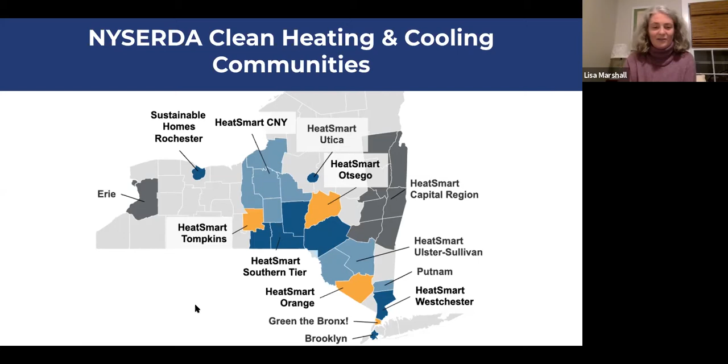So why do we need such a thing as a clean heating and cooling program, or a HeatSmart program? Well, the reason is because you might have heard about the climate crisis, or some are calling it the climate emergency. And the reason we are having a problem with our climate is because of all the greenhouse gas emissions from burning fossil fuels, mostly, that are going up and up each year. I'm 52. They've been going up every year of my life without any pause. And in order to maintain a livable climate for us and our children, and all of the wonderful diverse species on the planet, we're going to need to do something about this pretty quickly.

And so when we look at where those greenhouse gas emissions come from here in New York State, they come from basically three main sectors, which are transportation, on-site combustion, and electricity generation. And this on-site combustion piece of the pie, which is 38% here, is a little bit of a fudged number. It's actually a bigger number total than transportation if you calculate it a slightly more honest way.

So a lot of that on-site combustion is home heating. And that's because 90% of our households in New York use fossil fuels to heat our homes. So 90% of us have a furnace or a boiler churning away, eating up fossil fuels to produce heat. And that is why HeatSmart exists, to help educate people and make it easier for people to adopt alternatives to that current scenario.

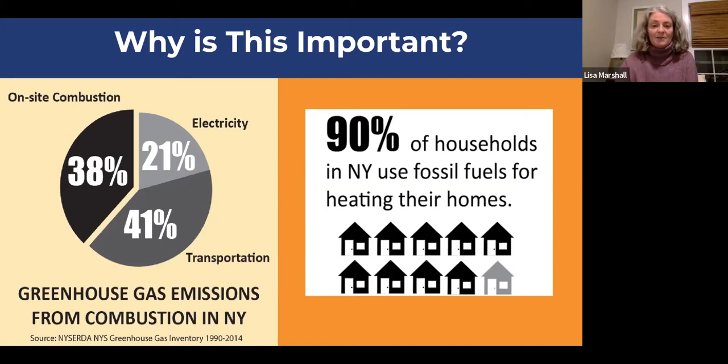So how do we do that? Well, that's a pretty daunting question. And the main way we are going to reduce our greenhouse gas emissions in these sectors, transportation and home and on-site combustion, is something that has been termed beneficial electrification. So if we electrify our cars and if we electrify our heating,

we can immediately have more efficient heating and transportation in our homes and for our cars with the current way that we generate electricity. And then as we add more and more renewables to the electricity grid, those methods of transportation and heating become even more efficient.

So this is a great graph from the Acadia Center that just shows, this top is what most of us have now, a fossil fuel car and a fossil fuel burning heating system in our house. And this is how many million metric tons of CO2 are produced by that. And down below, you can see that drops down significantly if you switch that to electricity. And this says current RPS, that's with the way we produce our electricity now.

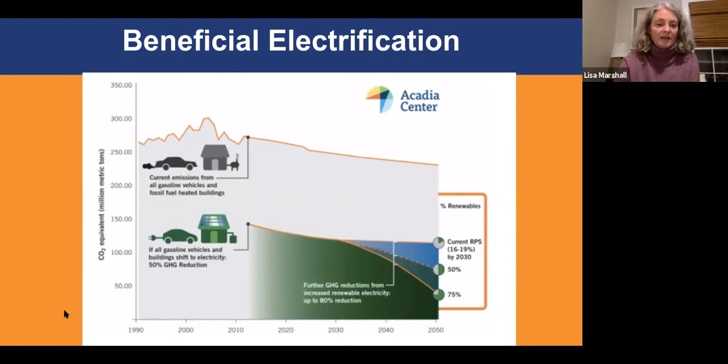So more specifically, because this webinar is steps to a fossil-free home, how are we using energy in our homes? This is not for New York. The next slide will show you New York more specifically, but I liked this slide because of the cute little house. And this is sort of an average house in the US, how they use energy.

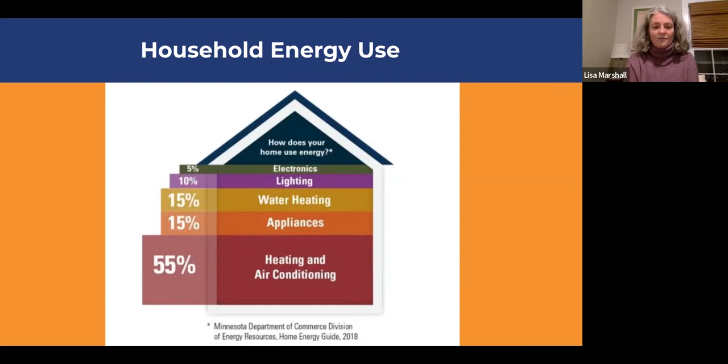55% of our energy use in our homes is heating and air conditioning, and most of that is heating. Only a very small sliver is air conditioning. 15% is running our appliances, 15% is hot water heating, 10% is lighting, and 5% is electronics. So the cell phone, the computer, the TV, etc. And that is sort of an average breakdown. Of course, your mileage may vary.

This next slide shows you a little bit more closely how we're using energy in our homes here in New York. So on the right-hand side, it's showing New York compared to the average mid-Atlantic states region and the whole US. And as you can see, space heating, this pink part, is 56% of how we're using energy in our homes. It's just huge because we live in this cold climate, and only 1% in New York is air conditioning.

Although this is a little bit of an older graph, I think it's from 2012. So that may have shifted somewhat in the intervening years, but generally speaking, it's about right. And then I want you to notice this 17%, this orange pie piece for water heating, because we're going to talk about that as one of the steps to a fossil-free home. And then 26% appliances, electronics, and lighting.

And I'm not really going to talk about lighting, but I'll do a shout out right now. If you haven't ever worked with the energy navigators to have a look at your own house, they are a great group. They're volunteers who are trained as energy navigators, and they will come to your house and help you look at things very specifically, like your lighting.

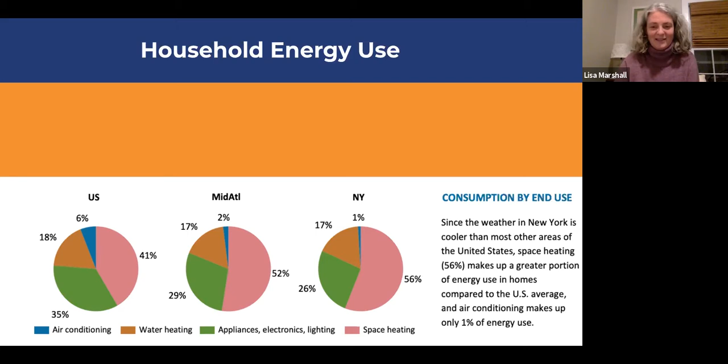And basically, if you're not using LED light bulbs yet, then get on it, because they're by far the longest lasting and most efficient light bulbs. And that's all I'm going to say about light bulbs. Okay. So 56% of the energy in New York households is for space heating, and 17% for hot water.

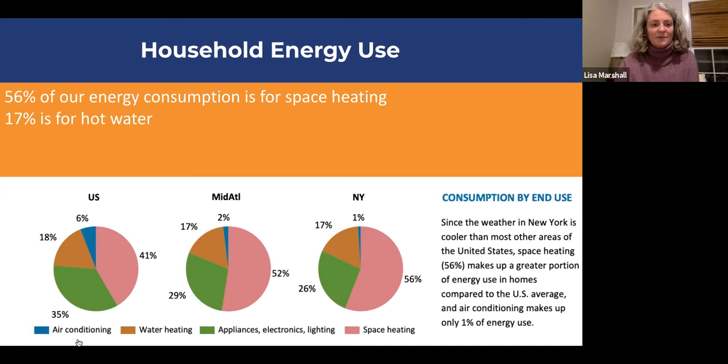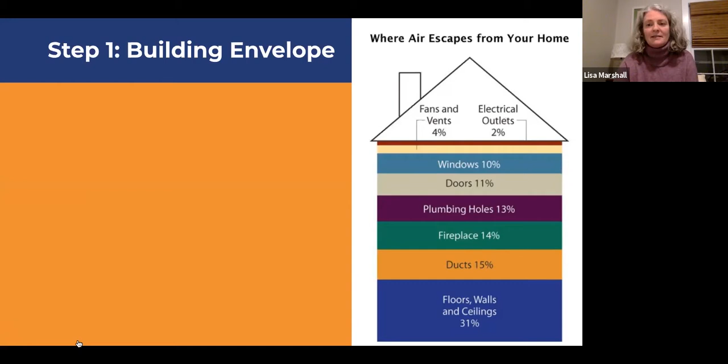So what are these steps that we're talking about? Step one is the building envelope. So that is how well insulated and sealed is your house. And as you can see on the right here, this is how heat energy escapes from your house. All these different places, and the most is the floors, walls, and ceilings, but also the ducts, the fireplace, the plumbing, doors, windows, fans, vents, and electrical outlets.

I just want to point out that windows are 10% on average in this graphic. And so a lot of people will say, well, the first thing you should do is replace your windows. And I don't think that's the first thing you should do. I personally preserve the beautiful antique wood windows in my house and try to seal up other things first.

Windows are a big piece, but they aren't as big as most people think. In the average home, air leakage is squandering 15 to 25% of the heat you're producing. So the first step to a fossil-free home is to make sure you're not literally throwing that heat out the window, so you're burning less fossil fuels to heat your house. And the same amount of unwanted heat is coming into our houses in the summer equivalently.

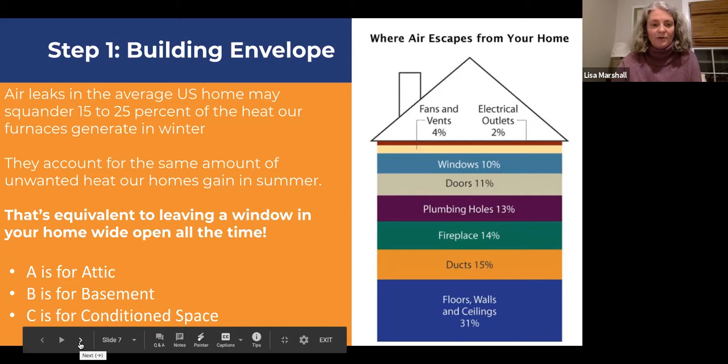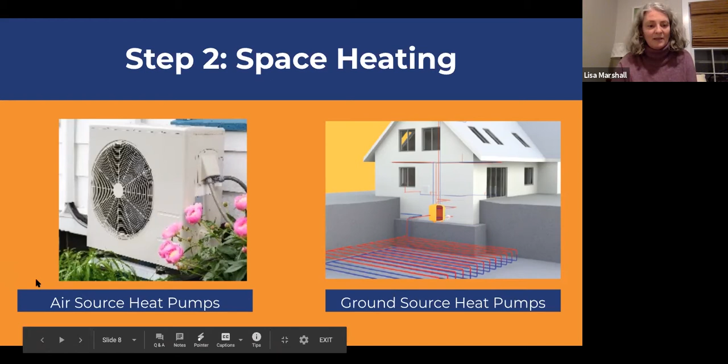So what is a heat pump? If you're not familiar with heat pumps at all, you might be confused about them. Actually, all of you have a heat pump in your home - that's what runs your refrigerator. You might have noticed there's a refrigeration loop on the back of your refrigerator that keeps the inside cool, and you might have put your hand behind a refrigerator and felt that it was very warm out there. That's because of the way the refrigeration loop works. Inside that loop is a chemical called a refrigerant, and the loop works on the principles of physics.

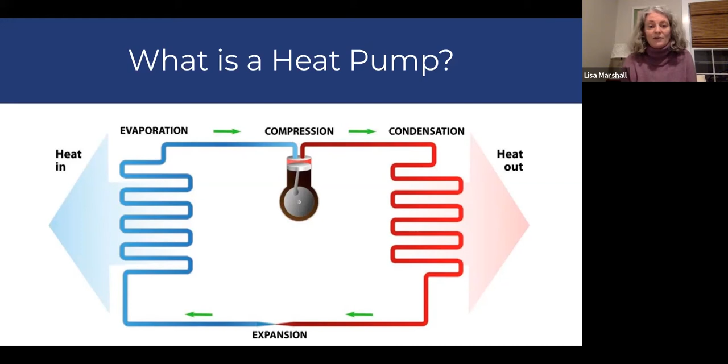So when you condense the refrigerant, you get heat out because there's a phase change in the refrigerant. And when you expand it, you get heat in when you evaporate that refrigerant. It's sort of a genius thing, because it's just this incredibly efficient way to take heat out of the air or out of the ground and put it through this refrigeration cycle that allows you to use that heat to air condition or heat your house.

So ground source heat pumps basically have three main components. There's the loop field, shown here on the right - that's a horizontal loop field. There can also be a vertical loop field where you dig vertical boreholes and put the loops down in those, or you can put heat exchange loops in a body of water sometimes. Those collect the heat from the ground and bring it into your house, and then it goes into the heat pump itself, which is this little guy on the left. It looks kind of big in that picture, but it's really about the size of a refrigerator, maybe a little bit bigger than your existing furnace or boiler, but it's not enormous.

That's where the refrigerant loop takes that heat from the ground and puts it through the condensation process, and puts the heat out into your house through your distribution system, which is the third part. In this one, we're seeing a forced air distribution system, which is these ducts that take the hot air and distribute it throughout the house.

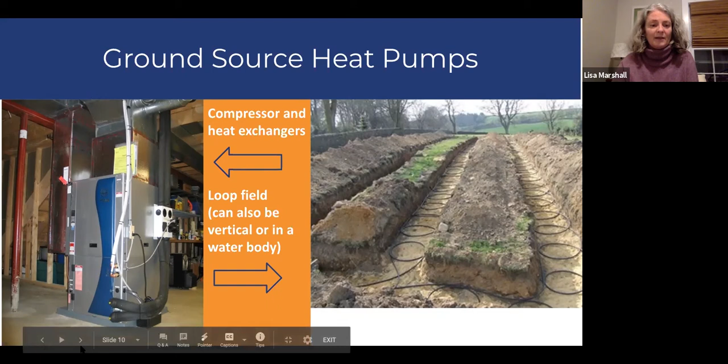We also have air source heat pumps. A very popular kind of air source heat pump is the ductless mini split. It's very popular because it's incredibly versatile. You can sort of put one of these almost anywhere that you need some heating or some air conditioning.

In fact, a lot of people in this area have ductless mini splits for air conditioning, and they don't even know that they could be used for heating, which is really unfortunate because they spend a lot of money on an air conditioning system that, if they had invested in one that was a good, efficient cold climate ductless mini split, they could use it for their heating as well.

And these are taking the heat energy from the outside air and putting it through a refrigerant loop that is connected from this outside compressor, and then sending it inside to these inside heads that are pictured, either this here, or you can see the drawing here. Those are high wall mounted heads. You can also get low wall mounted heads that look more like a traditional radiator.

And something that's really important to understand about these air source heat pumps is that a lot of people think that they don't really work in cold climates like ours. And that did used to be true, and it's not true anymore. There's been fantastic progress made in the technology for these air source heat pumps, and they work great. I was in Norway last year, and everyone there has an air source heat pump. And Norway's colder than Ithaca, so this is a very good heating system now for cold climates. They are guaranteed to operate down to negative 13, and they still function down to negative 19.

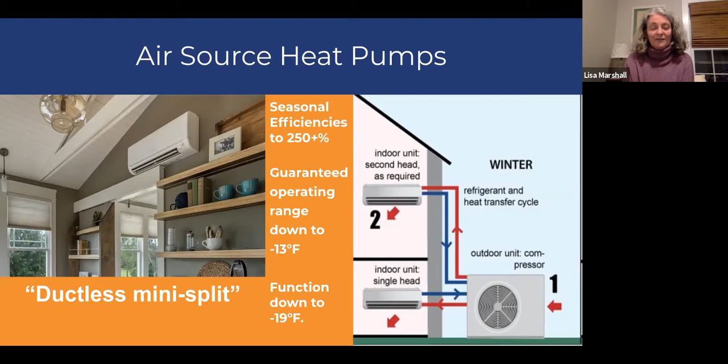And because the outside air is quite a bit colder than the ground, their efficiencies are not quite as good as a ground source heat pump, but still they can be up to 250% efficient, which is really great. Definitely a lot more efficient than any kind of fossil fuel burning you might be doing in your house.

I'm not going to talk too much about the incentives, but just to say there are incentives available to help make the upfront cost of heat pump installation more affordable. These are the incentives through NYSEG or whatever your local utility is. They could be different for different utilities, but in this service area, we have NYSEG, and what they offer is $1,500 off per 10,000 BTU hours of heating load for ground source, and $1,000 off per 10,000 BTU hours of heating load for air source.

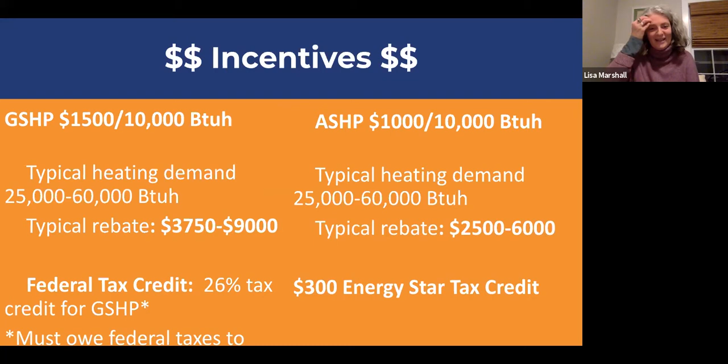So next year, that federal tax credit for ground source heat pumps goes to 22%, unless something changes at the federal level. And there are a lot more incentives to help folks pay for these heating systems if you are income qualified. We've just done a couple of webinars on that. You can find them on our website, or you can get in touch with me to find out more.

And if you're heating, again, with propane, oil, or electric resistance heat, there's going to be a heat pump pilot to help people who are income qualified and heating with those fuels convert to heat pumps. So please get in touch with me if you're interested in that, because it's going to be a really great, but also very short-term opportunity available to you.

And that's all I'm going to say about that tonight, but feel free to ask questions about that later, or make an appointment to talk to me. Okay, so step 3. Step 1 was your envelope. Step 2 is your heating system, and step 3 is your hot water.

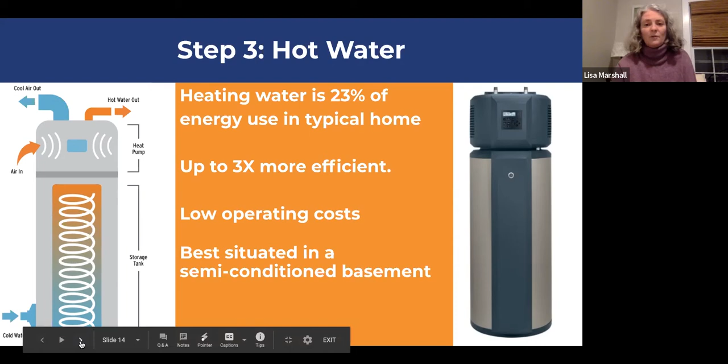And you have to pay a little attention to where you put these, because this little top unit on here, or also this one that sits on top of the water heater, is a heat pump. So it's taking heat out of the air. So you don't want it in your living space that you're trying to keep warm. That's sort of counterproductive. You want it to be in a basement space. That's best. Also, they're a little taller than a conventional water heater. So if you don't have a tall enough basement, that might not work for you. But if you can, this is what we highly recommend here at HeatSmart.

And we're really thrilled that NYSEG came out with a $700 rebate for these guys. There didn't used to be any rebate, and now there's a $700. And there's, again, for the rest of this year, a $300 Energy Star federal tax credit that you can apply for. So, that's $1,000 off the price. So there's really no reason to not put in one of these water heaters if you are looking for a new water heater.

I should have said at the beginning, the order of the steps might be different for each homeowner, and we can talk about that later. I put them in order of sort of how I prioritize them in my head, but step 1 for you might be the water heater and not the building envelope. So I just want to throw that out there. Okay, so that's step 3.

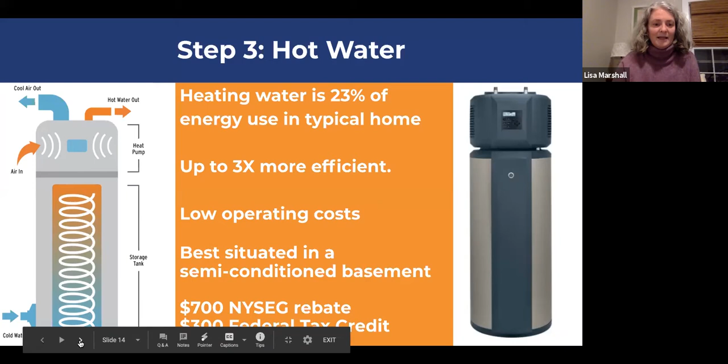Step 4, cooking. I find that a lot of people are ready to give up fossil fuel heating, but they're not ready to give up fossil fuel cooking because they say, well, good chefs cook on gas. That's because they haven't met the wonderful induction cooktop or stove. They are much more efficient. They are cleaner. They are safer. And they're cooler. In other words, they're not going to heat up your kitchen in the middle of summer because you're not going to have an open flame there.

And so induction cooktops work with basically like a magnet that connects to your pot or pan, and that magnetic connection is what creates the heat. So the food that's being cooked gets 90% of the heat that's generated, as opposed to when you're burning gas, 40 to 55% of the heat that's generated actually goes to the food. So the rest is heating up your pot, heating up your kitchen.

And top chefs all over the world really recommend induction cooking. Everywhere in Europe that you go has an induction cooktop. And these days, the snazzy fancy thing to have in a gourmet kitchen is a snazzy fancy induction cooktop. Gas is past, and this is the way to go.